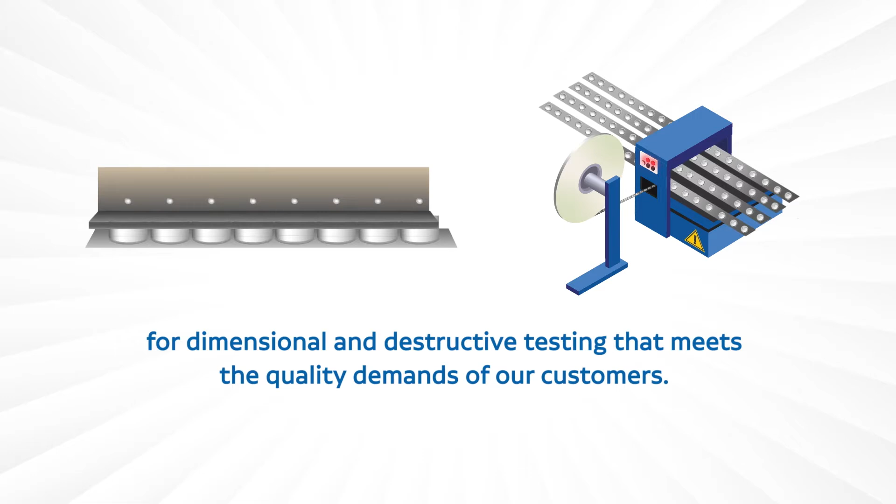Torus measurement systems are used extensively within the metal packaging industry for dimensional and destructive testing that meets the quality demands of our customers. With over 30 years in the gauging industry and operations across the globe, our automated shell and end inspection systems offer solutions to virtually any of today's inspection requirements.

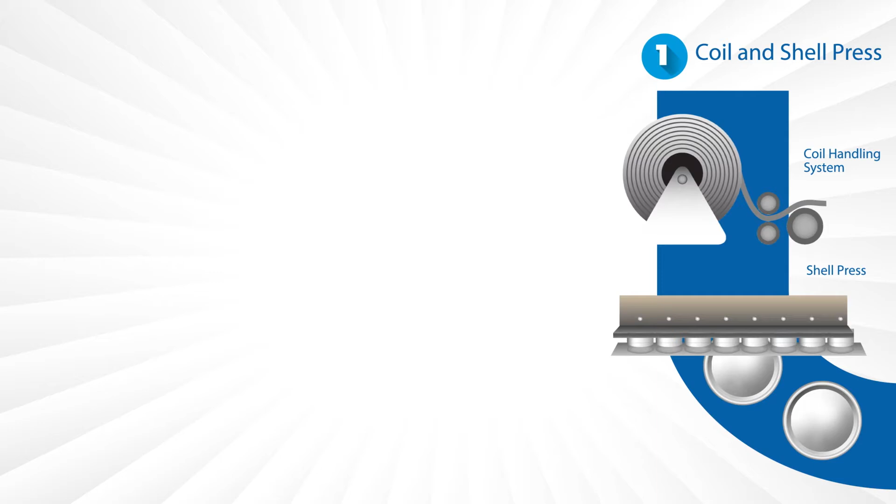Our modular solutions have your beverage shell and end inspection needs covered from start to finish. Moving from the coil and shell press stage to the accumulator, our Z401 shell inspection system defines the standard for dimensional inspection of any beverage shell type or size.

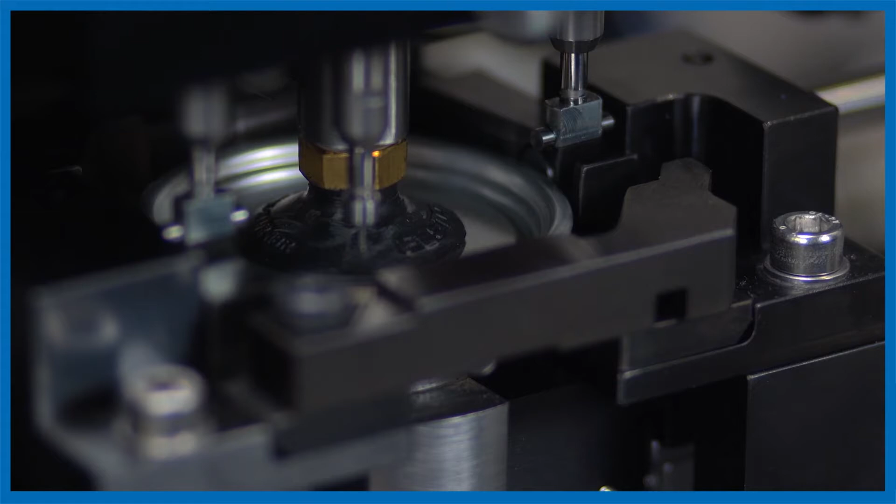Each shell is automatically loaded into the gauging module with an integrated pick-and-place system. The automatic grain alignment module ensures precise and accurate inspection of all industry-standard inspection features.

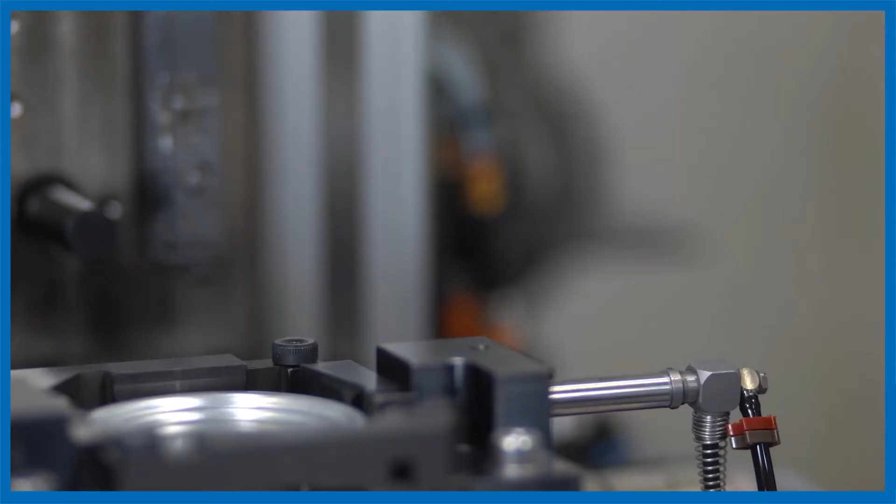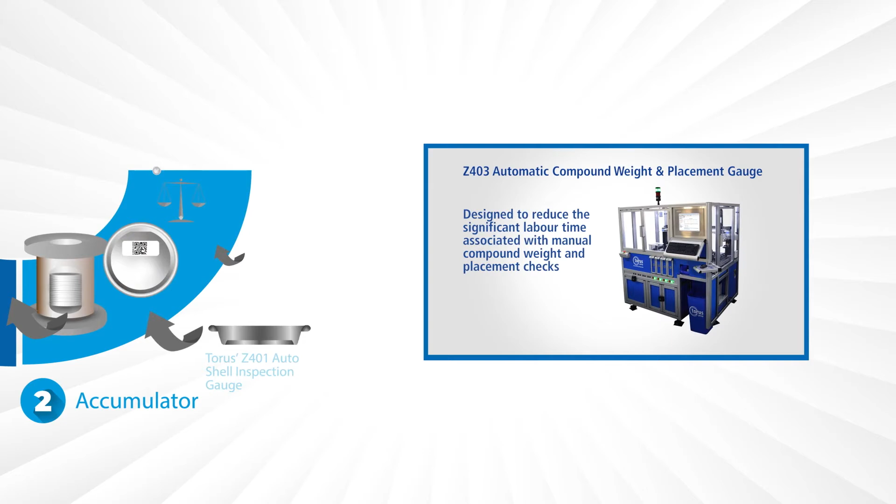Next, we briefly introduce the Z403 compound weight and placement gauge, which reduces the significant labor time associated with manual compound weight and placement checks, whilst also reducing the risk of human error.

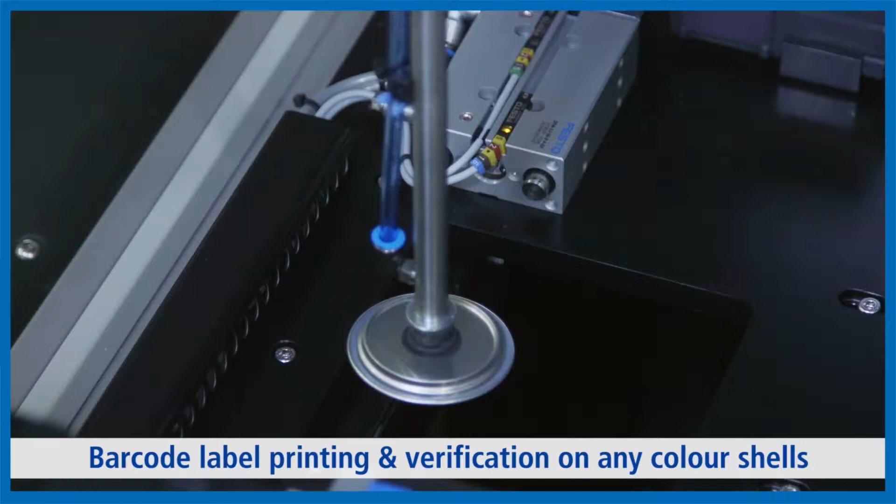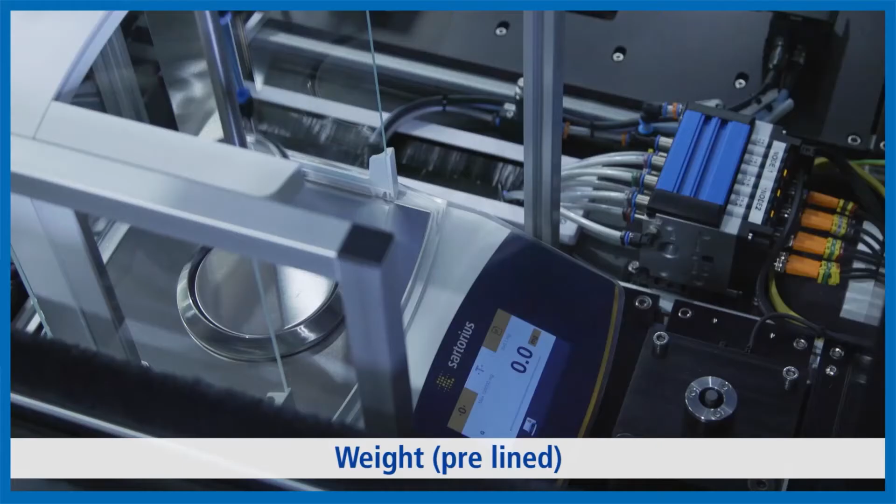It incorporates state-of-the-art printing technology to label each shell with specific information related to the module, liner, sample, date and time, ensuring the measured data is correctly tagged to the correct compound liners. At this stage, only the pre-compound weight beverage shell is inspected in order to collect the dry shell weight.

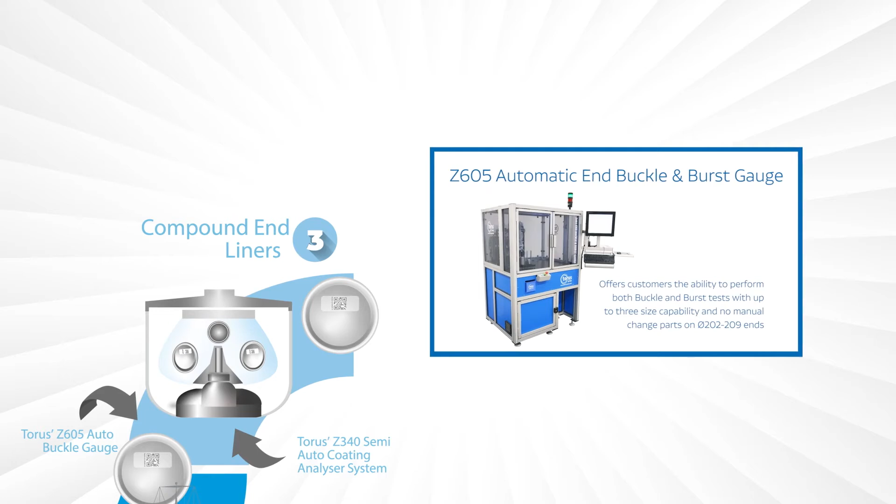We then move on to the Z605 end buckle and burst gauge, a world first of its kind, with up to 3 size capability with no manual change parts.

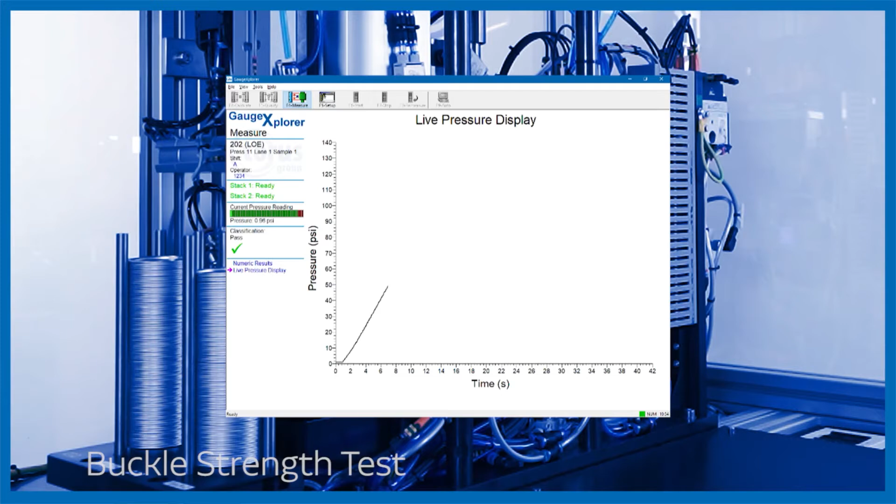The operator simply loads a batch of beverage shells or ends into the gauge to initiate both the buckle and burst tests. The collated data is then quickly exported to the customer's SPC data acquisition system for analysis.

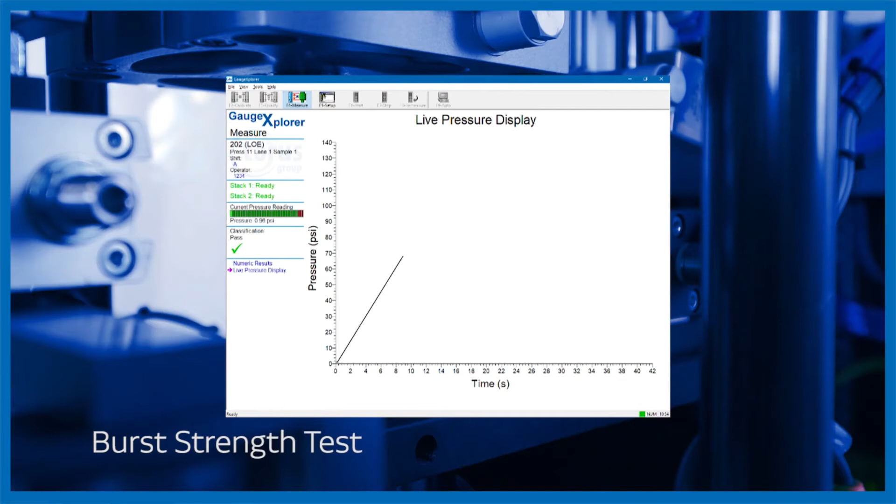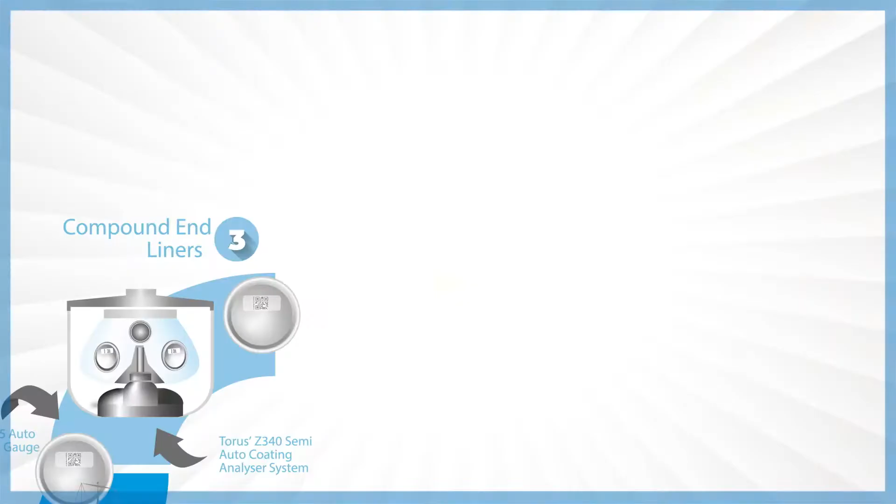As we reach the compound liner stage, we reintroduce our Z403 compound weight and placement gauge, showing the post-weight and compound placement inspection as we spoke about previously.

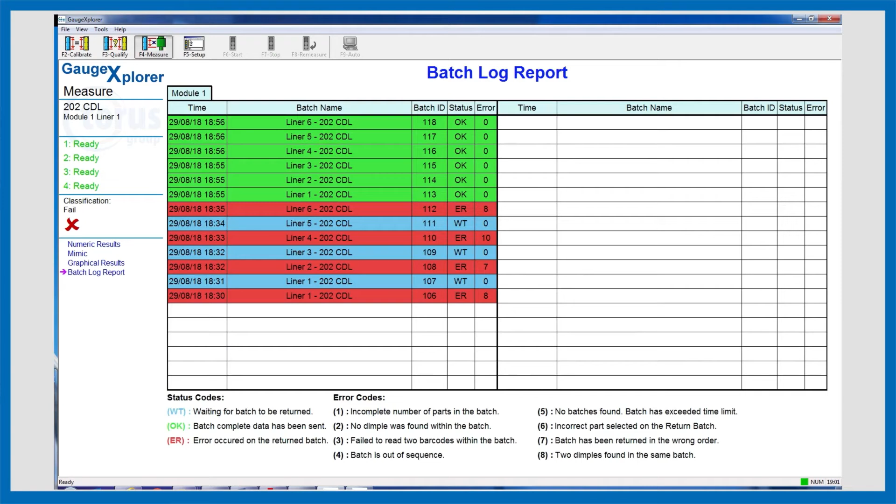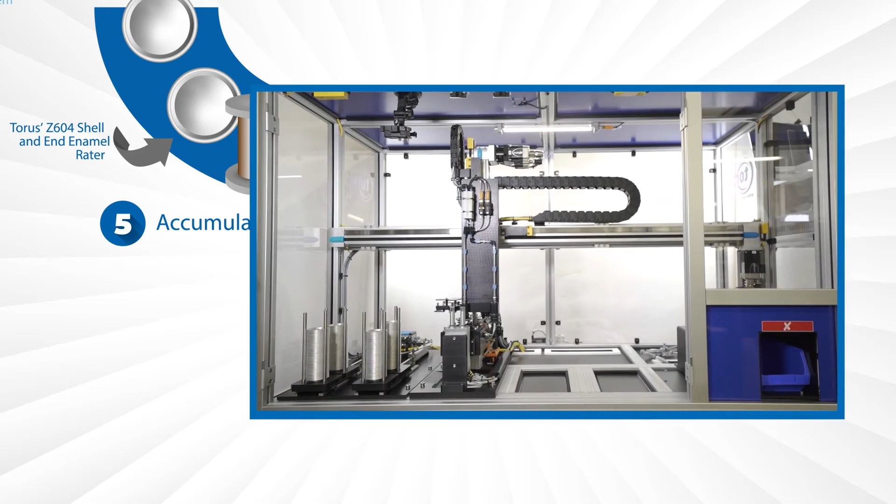Moving on to the accumulator module, at this stage our Z604 beverage shell and end enamel rater monitors the critical manufacturing process for testing metal exposure on beverage shells, checking the integrity of the lacquer or coating.

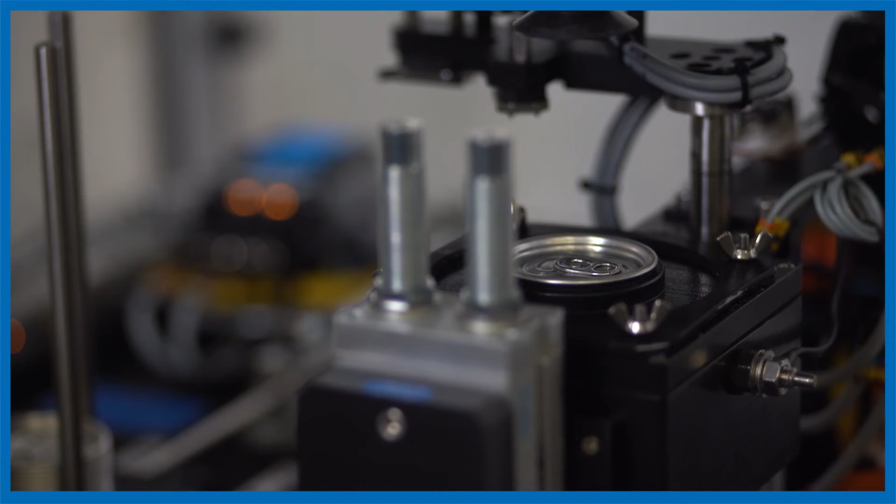As we move into the EOE conversion system, we can run back through our Z605 end buckle and burst gauge and our Z604 shell and enamel rater. The Torus systems have the capability to inspect beverage shells both pre- and post-compound applications.

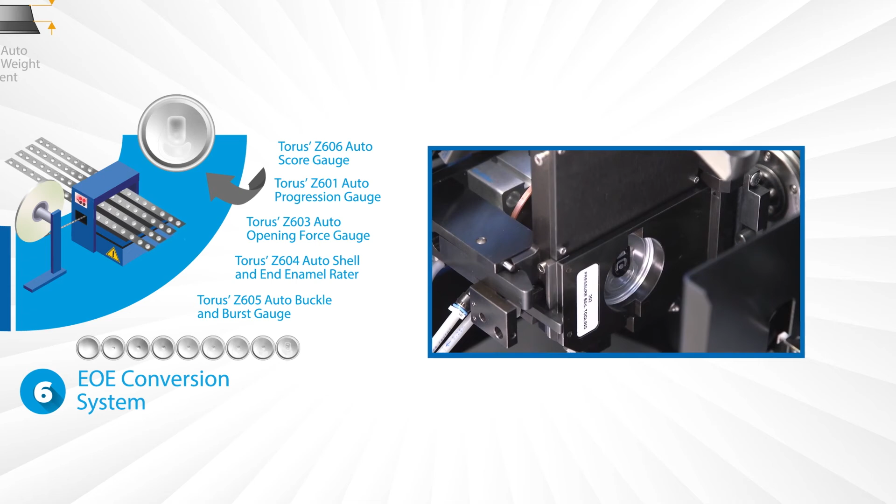This brings us to our Z603 automatic opening force gauge. By monitoring critical manufacturing parameters over time and relating the press performance to the change in the end's opening signature, the manufacturing process capability can be observed.

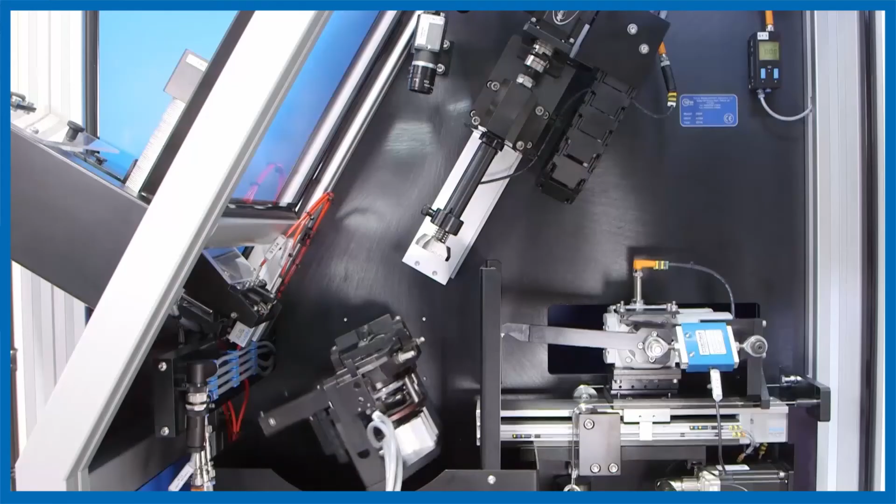Features included for inspection are pop and tear, tab strength, vent and missile, and score aperture opening, tuck under. All these features are available with programmable pressure settings to suit the customer's requirements.

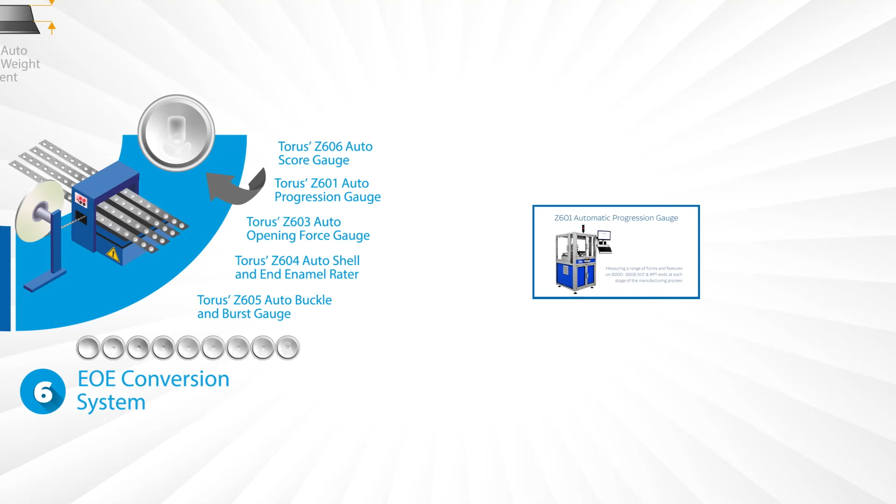We finished the Easy Open End EOE conversion system at the Z601 automatic progression gauge, which utilizes two opposed triangulation laser sensors to measure a range of forms and features on ends at each stage of the manufacturing process, covering all conversion types.

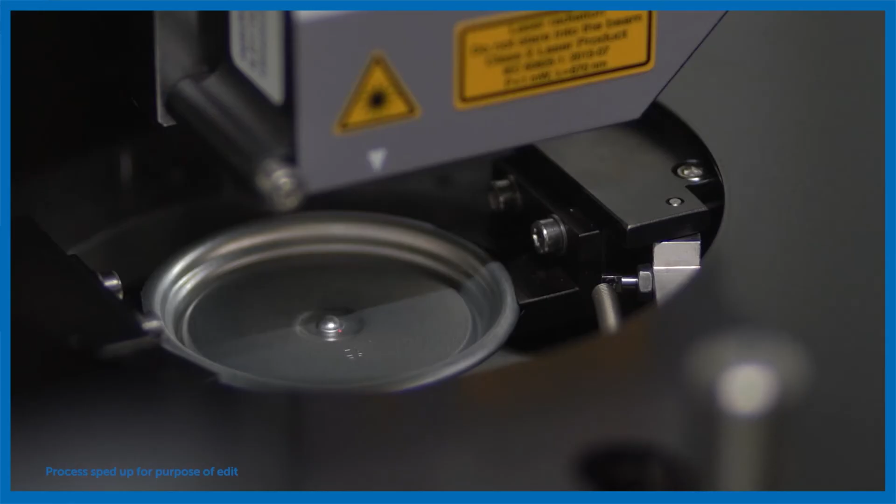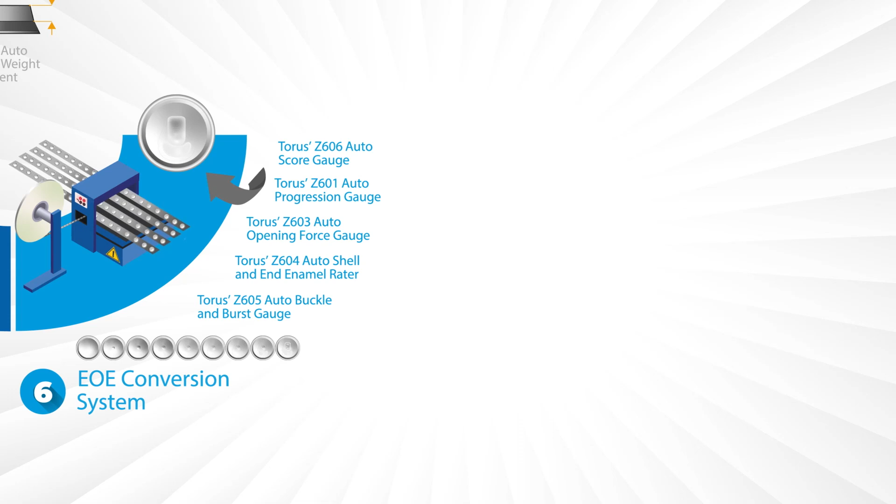Currently in development and new for 2022 is our Z606 automatic score gauge, our non-contact automatic score residual inspection gauge using the latest white light interferometry technology.

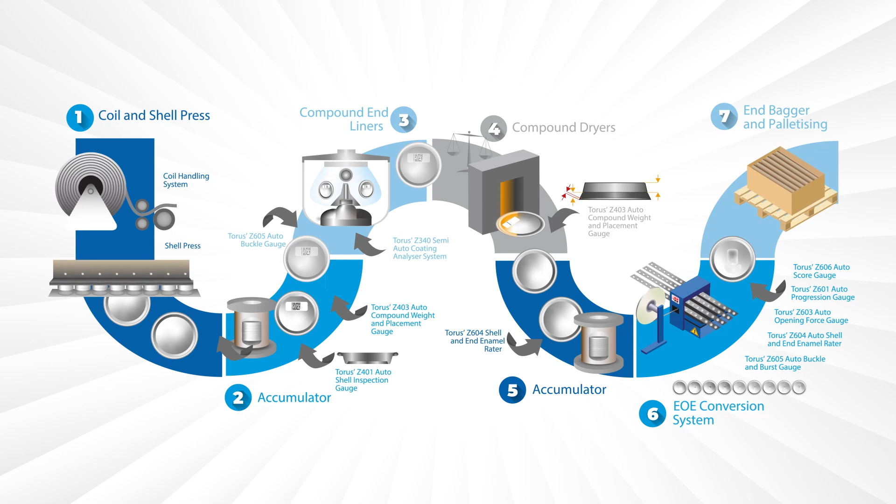Our modular gauge setups allow you to customize your gauge as and when you require, giving you the flexibility to ensure you have a total quality solution that fits your requirements perfectly.